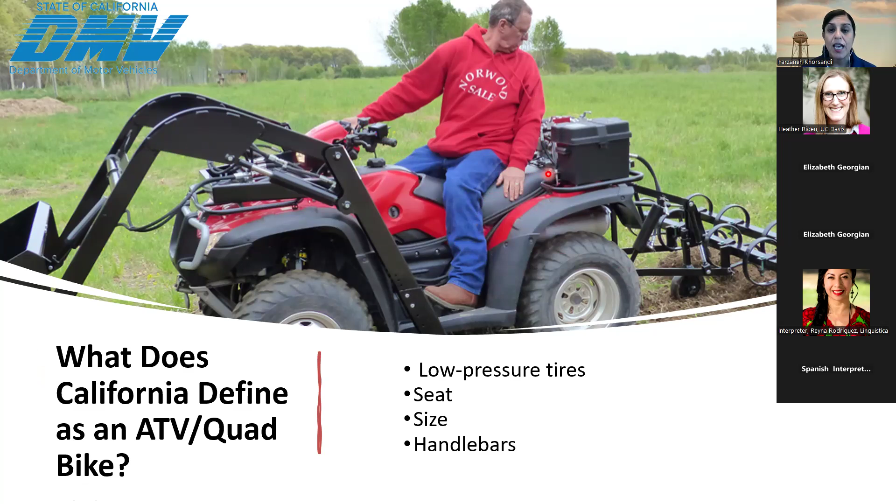Based on California government, there should not be an extra rider on the ATV unless there is an extra seat, and there should not be more than one extra seat on the ATV, based on the DMV definition. Generally around 100 to 200 kids every year die in ATV incidents, and around 500 to 700 adults die. The number is rough, but this is the general idea. And this is not only in agriculture, it's for general ATV incidents.

If we focus only on agriculture, which is the main topic of this presentation, it's good to know that based on OSHA, 3 out of 5 occupational ATV fatalities happen in agriculture. ATVs, after tractors, are the second leading cause of fatalities and injuries in agriculture for adults and kids. If we focus only on kids, this is among the leading causes of injury in agriculture among youths younger than 17 years old.

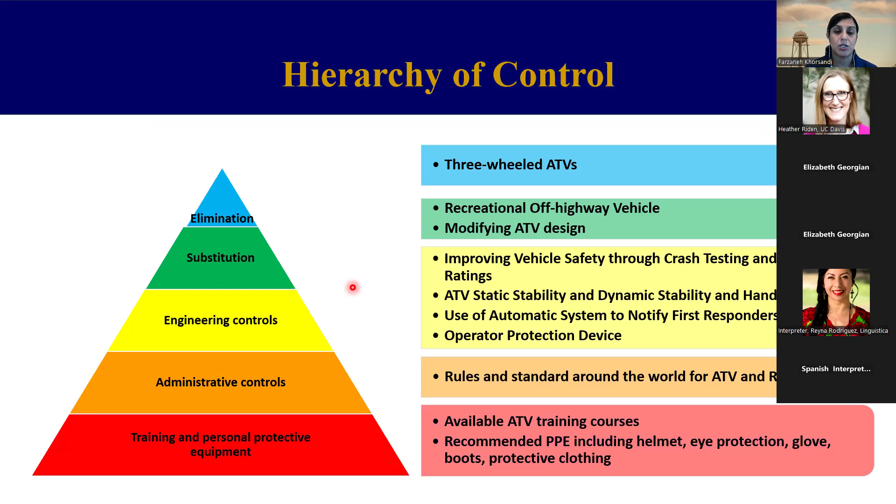In this white paper, developed based on the hierarchy of control, we evaluated different protection methods. We looked at what has been done to this point, what the current need is, and what we should do in future to improve the safety and health of ATV operators. This white paper has been very helpful for navigating my research in ATV study.

The format of this presentation is based on tags and signs on the ATV. I will talk initially about the loading capacity of the ATV, which you can find on the body of the ATV. The next one is tire pressure.

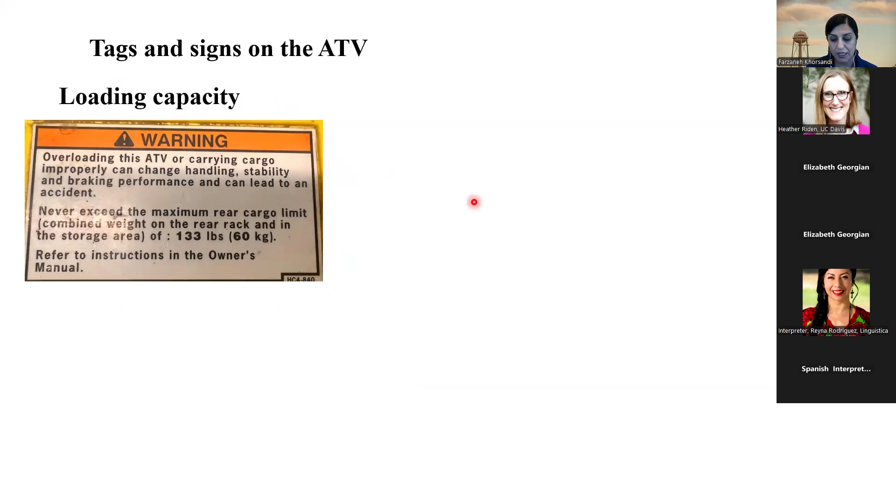We have a small study related to tire pressure, and also age, which is focused on safe riding of ATVs on farms. We also have a small project about passengers and riding ATVs on the road, which is part of this tag, and also using PPE, especially the helmet, for riding ATVs.

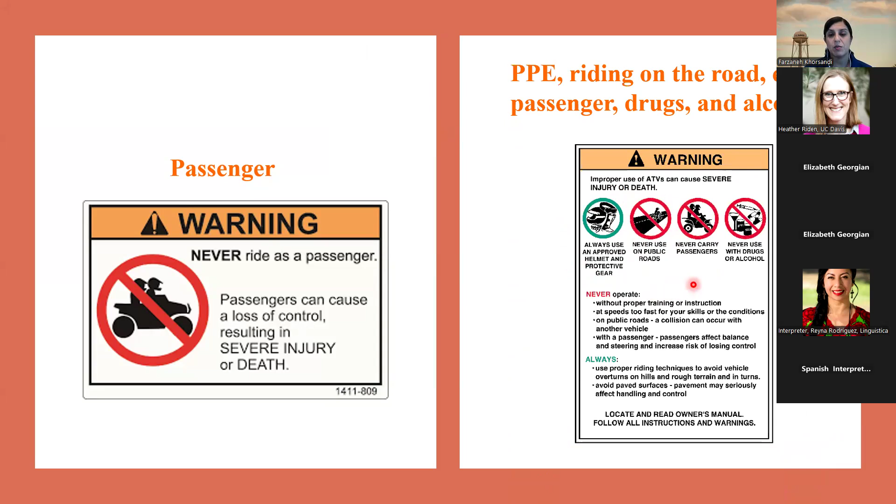For this study, we developed the ATV safety test station. This is the first part, which includes a hydraulically powered tilt table. We have a specific frame for this table, and we place different scales under the tires of the ATV.

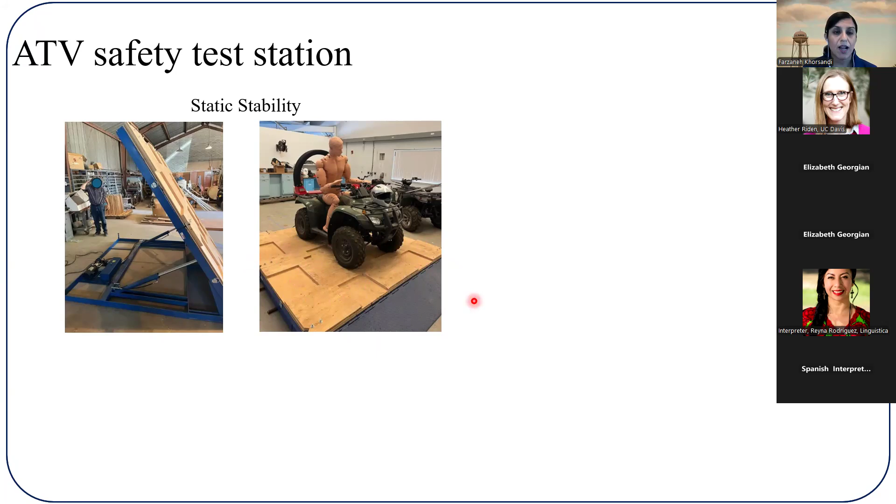I'll explain this more—this is for evaluating the static stability of the ATV. The second part is dynamic stability of the ATV. We designed this outrigger, and we have several sensing setups to measure different riding parameters of the ATV during the dynamic stability test.

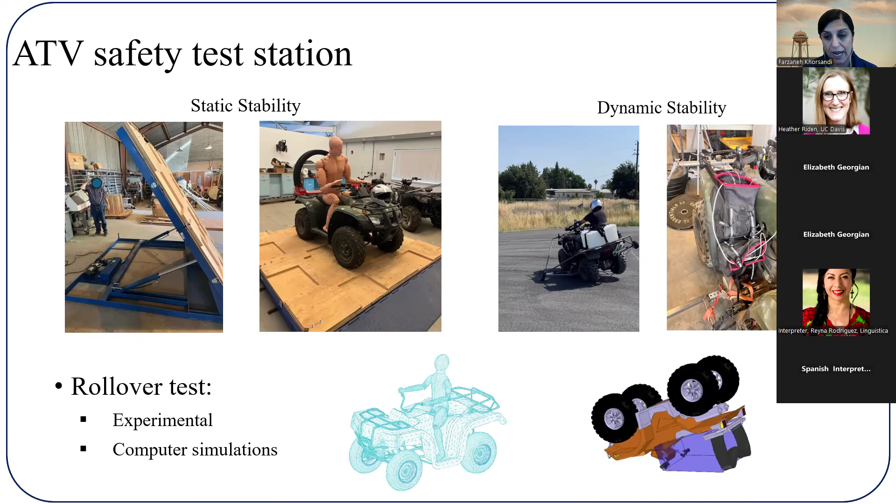We are also developing a finite element model—a multi-body finite element model—for different parts of this ATV safety study. We are also developing an experimental setup for simulating rollover accidents, which I will show step by step in this presentation.

The first part is a project funded by the Western Center for Agricultural Health and Safety. In this project, we focus on prevention and protection. For prevention, we are evaluating and recommending the amount, location, and type of load added to the ATV, and evaluating the stability of the ATV for lateral and longitudinal stability.

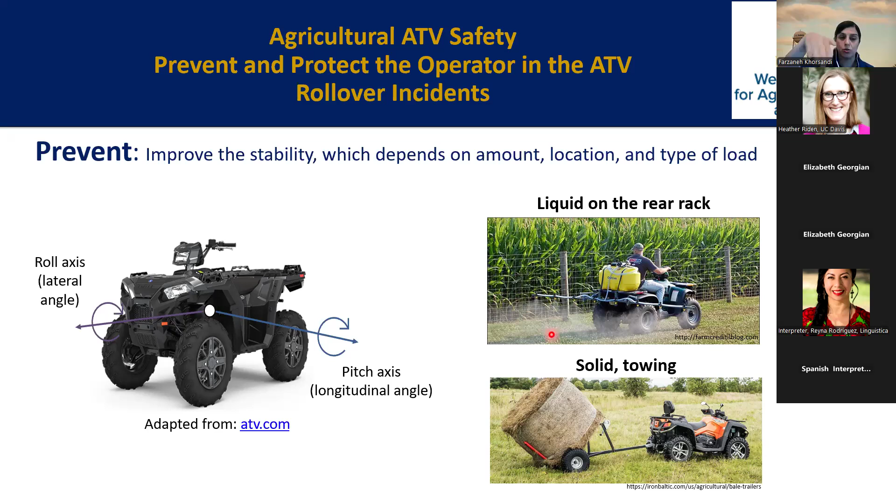I'll give some examples of the load. One is a liquid load on the rear rack, the next is a solid load towed by the ATV. We are evaluating the amount, location, and type of load for both lateral and longitudinal stability of the ATV. This is the sensing setup for the ATV test.

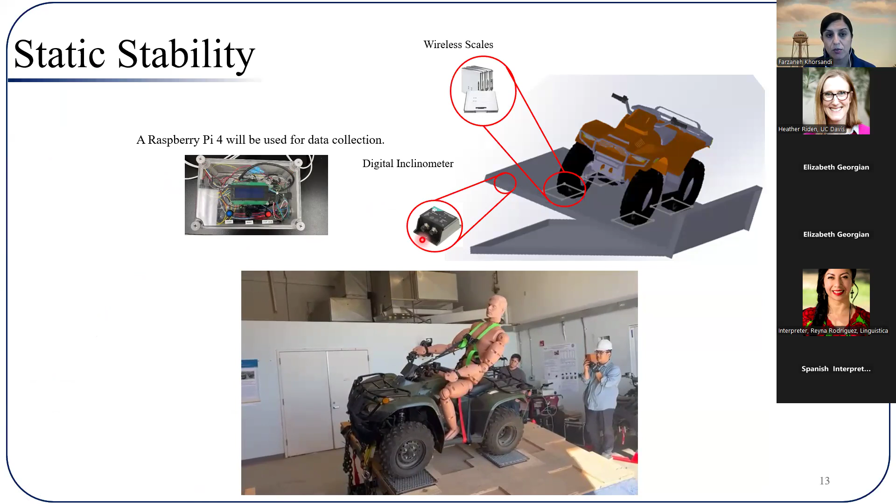I'm going to run this video. For this, we have different parts: the sensing setup for collecting data, using a Raspberry Pi. We have several scales under the tires of the ATV, a dummy, and an angle measurement sensor.

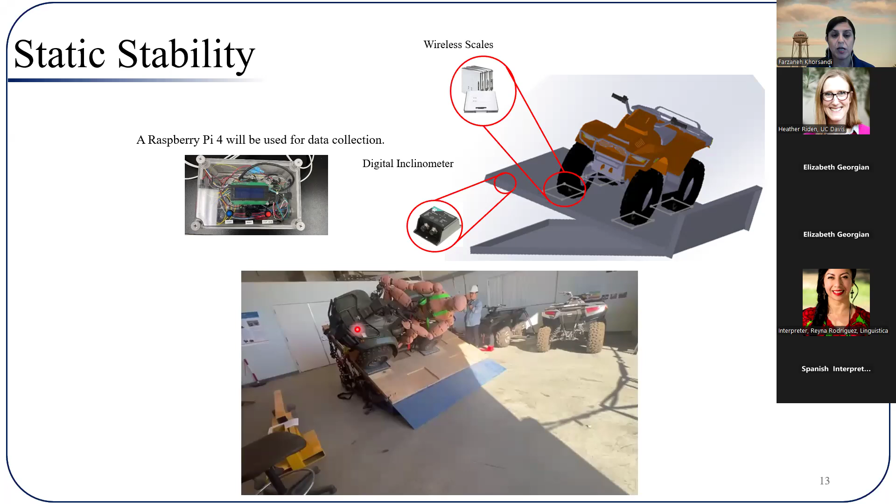We tilt the ATV to the point that it starts rolling over, which is when the top tires show zero on their scales. This is some of the results we collected. This part of the study is almost done.

This is some of the results for the lateral stability test, similar to what I showed you—we tilted the ATV to the side. Based on ANSI/SVIA, the stability of the ATV should be more than 24 degrees, meaning the ATV starts rolling after reaching 24 degrees.

As you can see, we have different types, liquid and solid, based on the recommendation by manufacturer and also safety specialists. When we have liquid, for some models, especially model D and E, and because we didn't bring the title, make and model of the ATV here, but for some of them, they cannot pass the test based on our study. For other ones, the numbers are very close to this cutoff that is based on the ANSI/SVIA standard for ATVs.

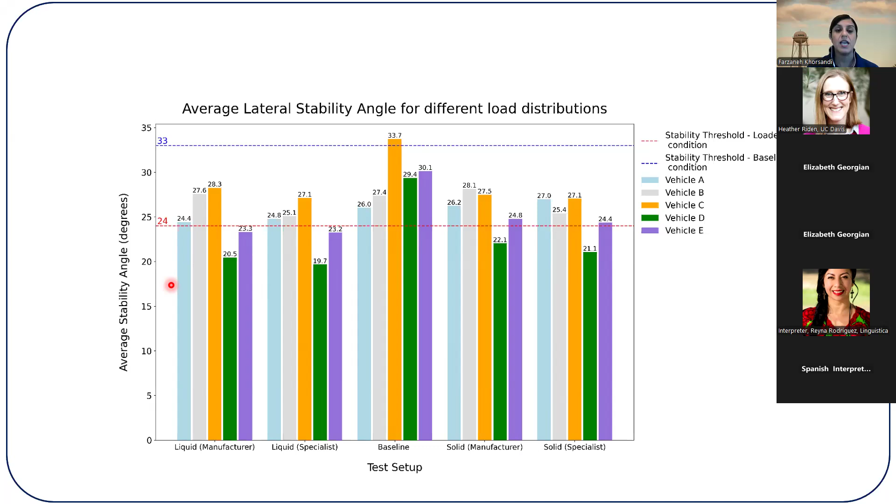Results of this study, we are publishing them in a journal. Again, we are hoping to provide recommendations about type, location, and amount of the load. Especially we have concern about the liquid load, because the liquid load has shift, especially when the tank is semi-full. This is a dynamic stability test.

We have steady state circular driving test and J-turn test. I will go through both of them. We also have a bump test that we didn't have any data for this point, and because of that I didn't present the bump test.

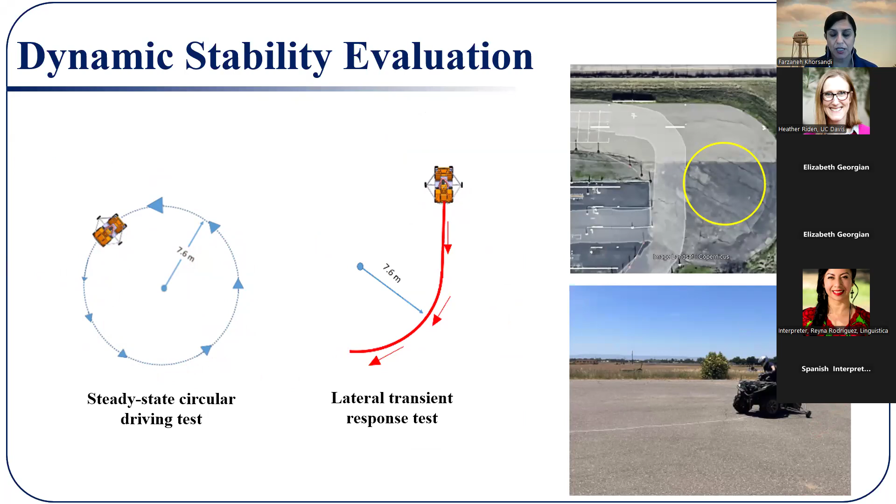We are conducting this study in the Pavement Center in UC Davis. They are very generous to give us the chance to use their facility to conduct our test. I will show you this test.

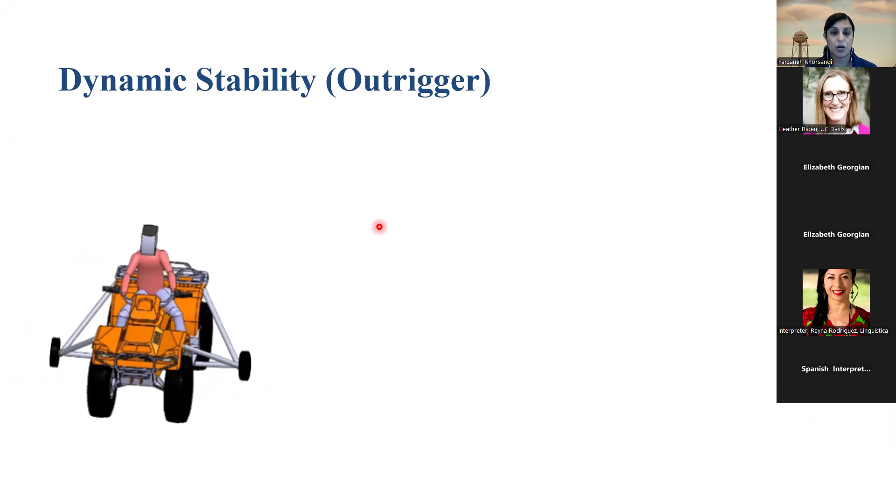For this test and for safety purposes, we designed this outrigger, which is a universal outrigger, meaning we designed one for different designs of ATV, and with simple modifications we can attach it to the ATV. I would like to thank Jed, our shop specialist, who helped us with this very creative design.

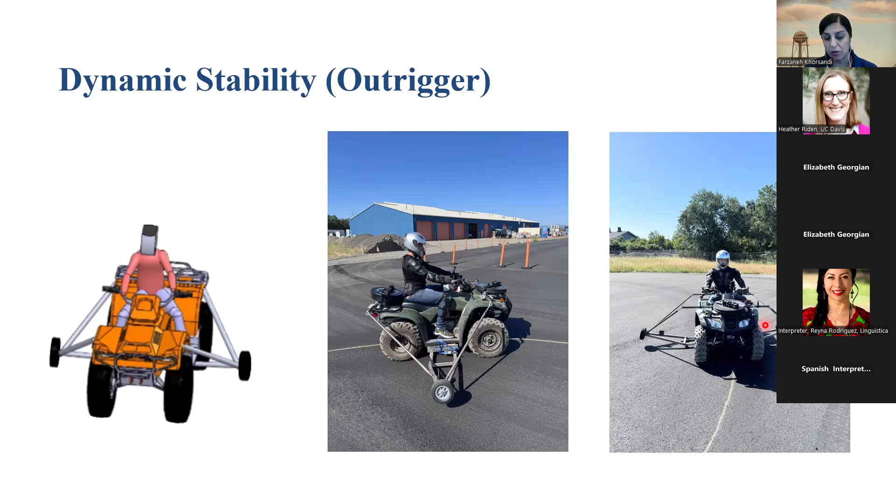Again, for this study, we have the load in the rear and also in the front, and also we have the liquid tanks. As you can see, I'm not sure if it's clear here, we have a semi-full liquid tank to evaluate the liquid shift in these studies as well.

Based on previous studies, around 30% of ATV related incidents happen when there is a liquid, when the operator is doing the spraying. Because of that, we have a specific part of the study focusing on liquid tanks.

This is a dynamic stability test, the J-turn test. For this test, we run the ATV on a straight line, then we have the sharp turn, and then we evaluate the response time of the ATV. This is one of the tests, as you can see.

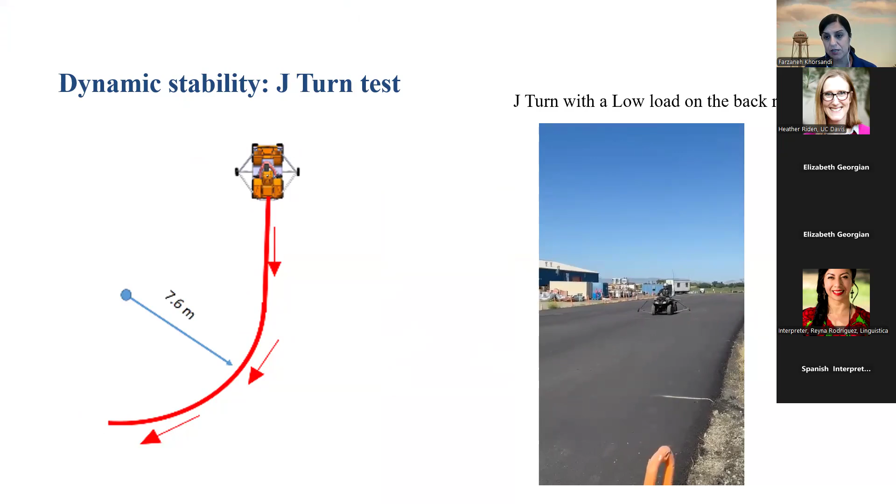As you can see, we have a small load on the front and a small load on the back. This is based on, I think, manufacturer recommendation. This is some results of this study. Again, we evaluate the response time of the ATV.

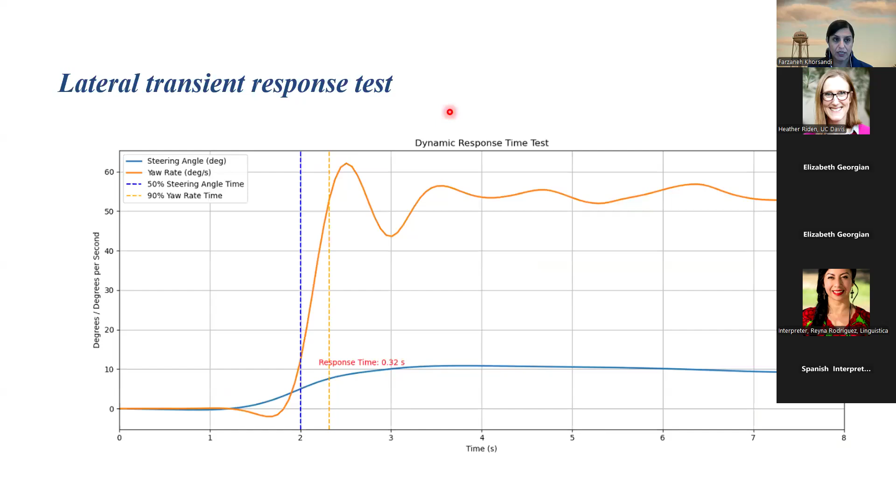The other one is the steady state circular driving test. For this one, we start driving the ATV around this circle, and we increase the speed of the ATV until the point that the ATV either goes toward the center or it gets away from the center, which we call oversteering and understeering.

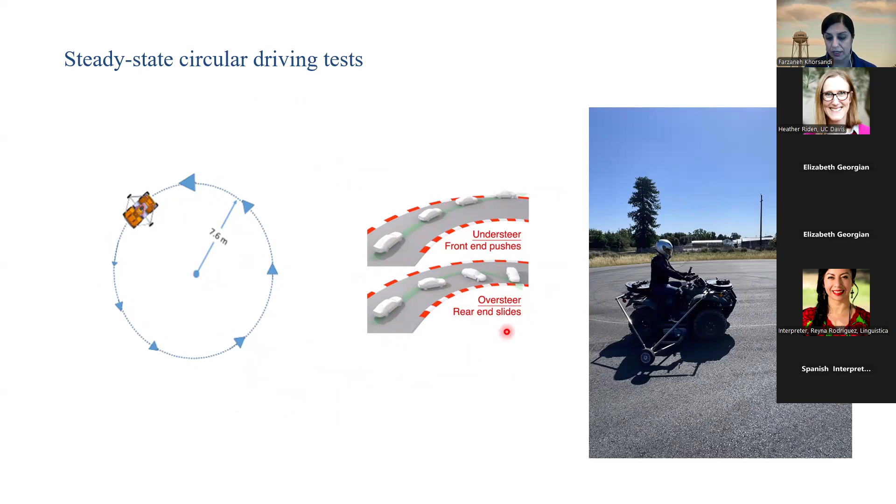This is some of the results of this study. We have understeering here until 0.55 G, and after 0.55 G we have oversteering. This condition is representative of an unstable riding ATV condition.

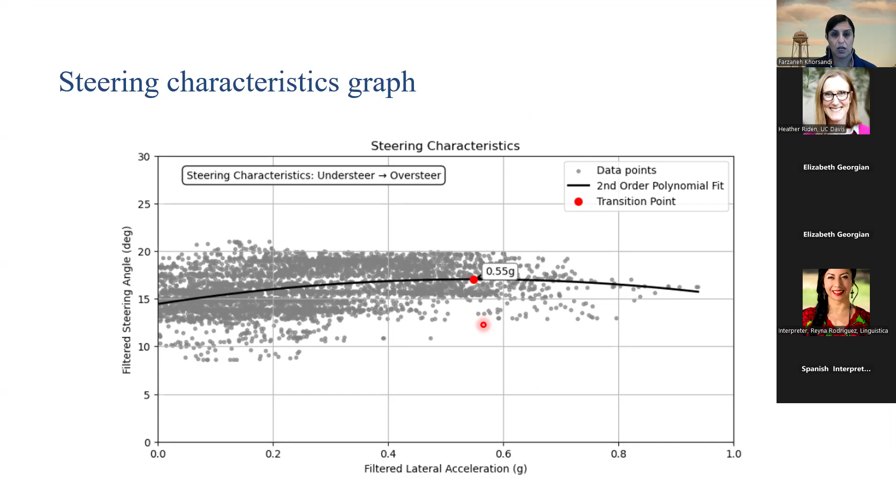Again, we are still working on the result of dynamic stability. I showed you for static stability we have some kind of conclusion for the study, but for dynamic stability we are still working and collecting the data. I would like to acknowledge Fernando Santos for all he is doing; he is the one running all of those tests.

As I mentioned, this part of the project focuses on, one, prevention, and second, protection. Prevention: we are hoping that by recommending the amount of added load to the ATV, we prevent rollover incidents and improve the stability of the ATV. The second part is protection, which means we have different designs of crash protection devices. I will talk a little bit about crash protection devices.

You can see different designs of crash protection devices in this slide. These two, quad bar and quad bar flexi, they are from Australia. Lifeguard is from New Zealand, and AR-Quad is from Spain. The way these crash protection devices protect the operator is by providing a crawl zone under the ATV.

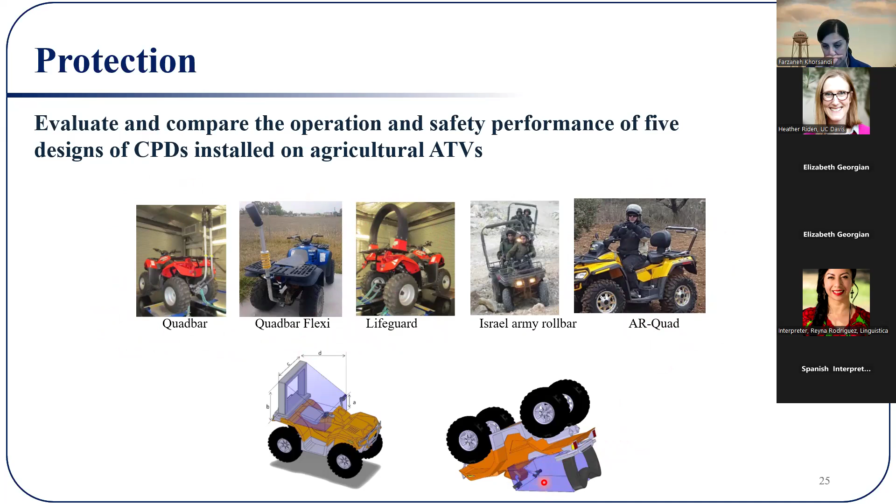This blue area is the crawl zone that the CPD provides for the operator, and I will show you how they work.

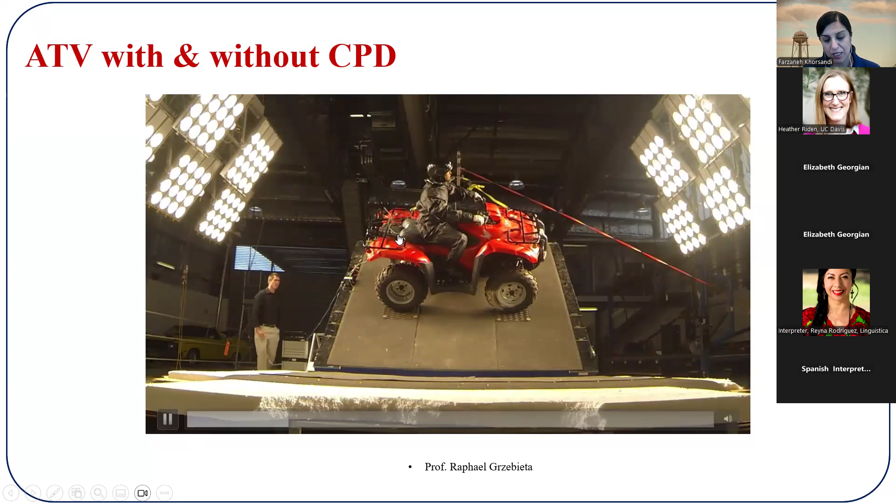This is one of the studies that was conducted by Raphael Grzebieta in Australia. As you can see, this is the ATV without CPD, and you can see how it crushed the operator.

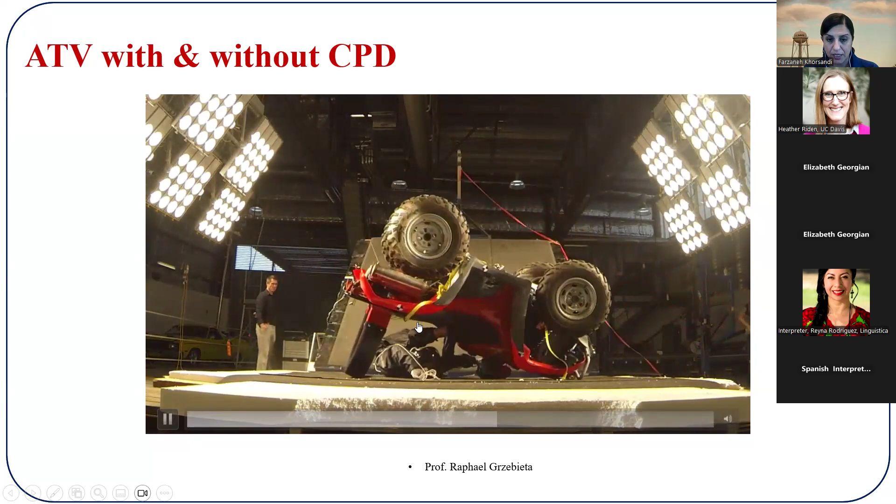The next one is ATV with lifeguard, and you can see that the lifeguard provides a clearance zone under the ATV. This is the clearance zone under the ATV. The last one is a quad bar that prevents the continuous roll of the ATV.

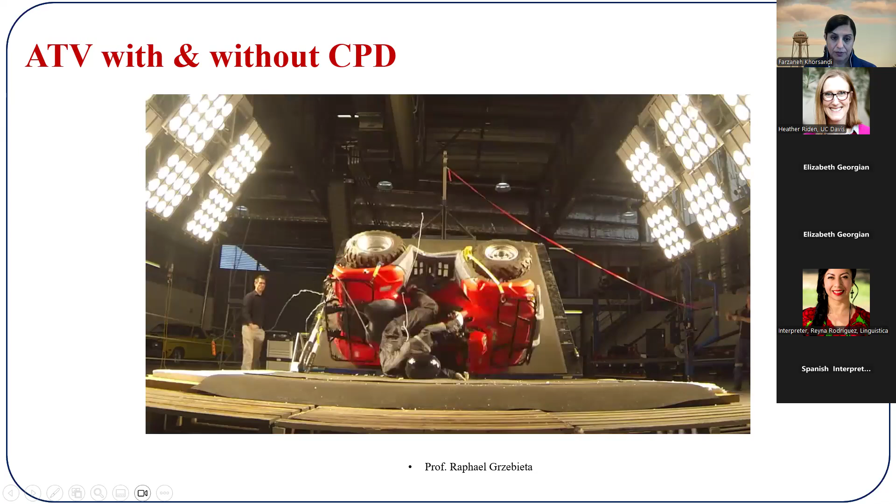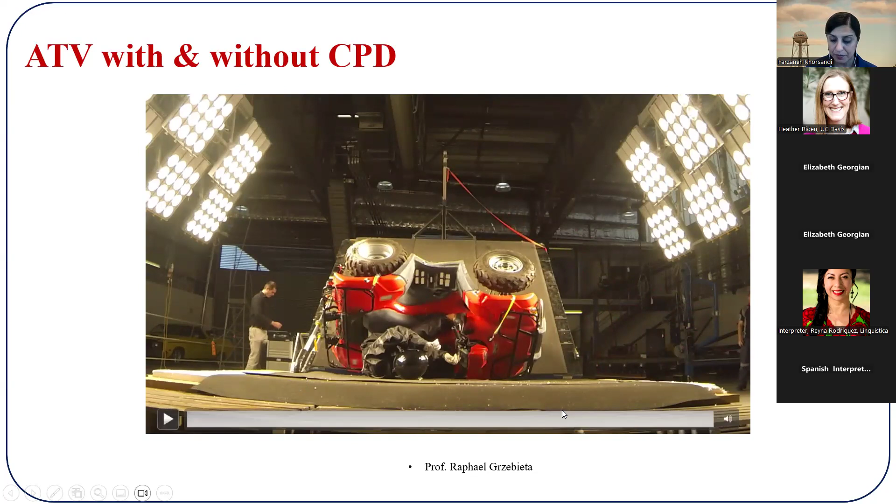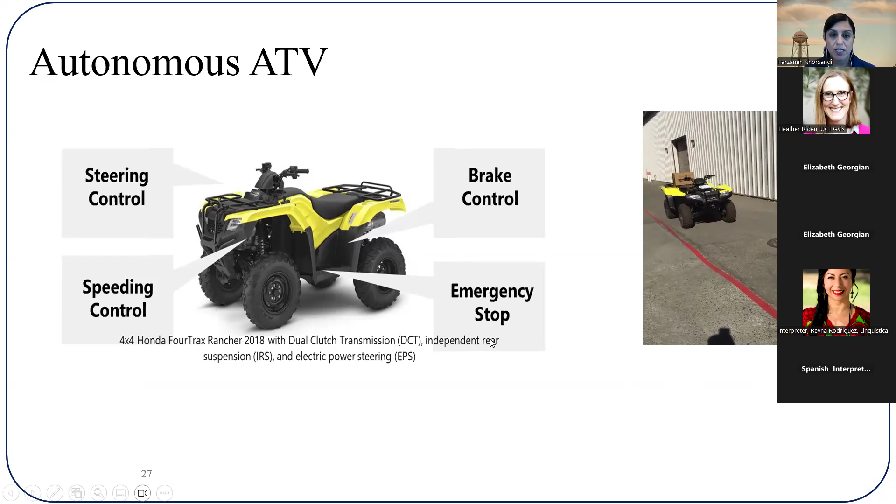For this part of the study, we developed an autonomous ATV. This is our autonomous ATV, and this is the initial test that we had. This is during COVID, you can see we were wearing masks, but we are still working on this part of the study. This is the autonomous ATV, and we also need one of these ATDs.

They are very expensive, around $500,000. I've been searching for the past 5 years and couldn't find anyone, but since our study is focused on asphyxiation, I'm going to do the test using one of these pressure pads, placing it on the body of the dummy. I hope that we can get some good results.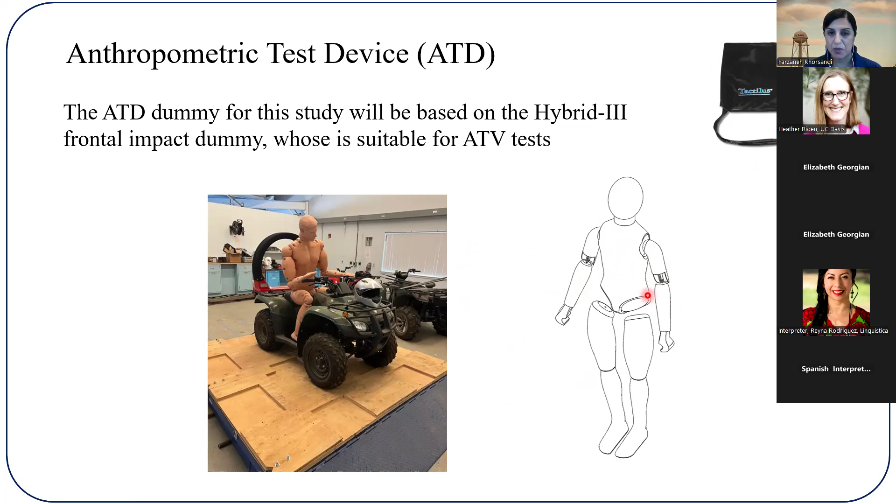Besides that, we are using different cameras to record the incident, and we also have one high speed camera that can take a lot of photos. I don't remember how many frames per second, but we're going to use this camera for our study to record the data. And this is the test setup.

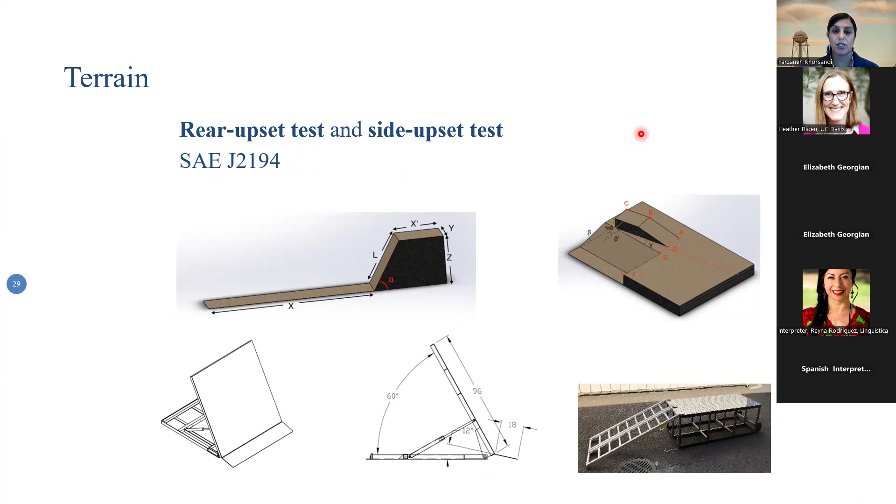We are evaluating the side roll and rear roll, and we modified the SAE J2194 standard. We are hoping to evaluate the performance of CPD, especially for agricultural setups, for both side roll and rear roll. For the CPD project, we have several designs of CPDs, and this is a link to the study.

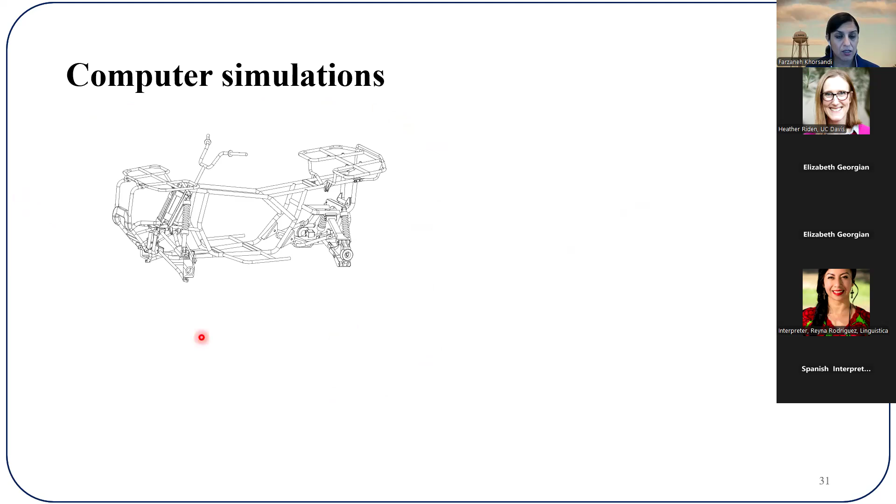The next part of this study is computer simulation. This is the simulated chassis of the ATV. We tested the suspension system and also the tire, and got the different characteristics of them. We have a pretty accurate model of the ATV and also the suspension and tire system.

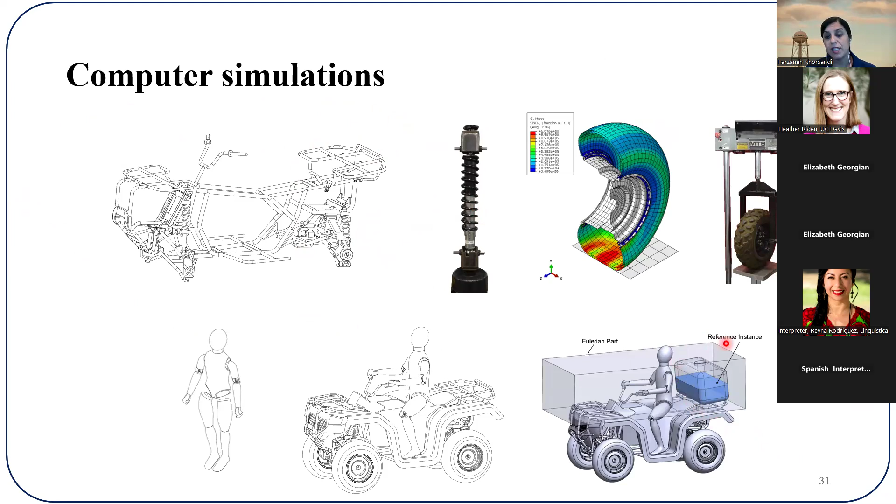We also have a dummy. We simulate our dummy, and we also simulate the liquid tank, which was one of the most challenging parts of this study. In this study, since we have a limited number of autonomous ATVs and scenarios that we can evaluate with experimental simulation...

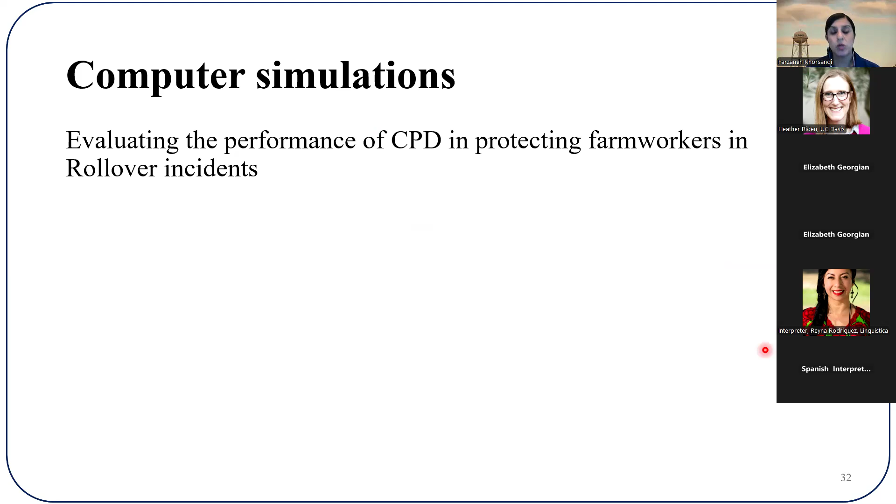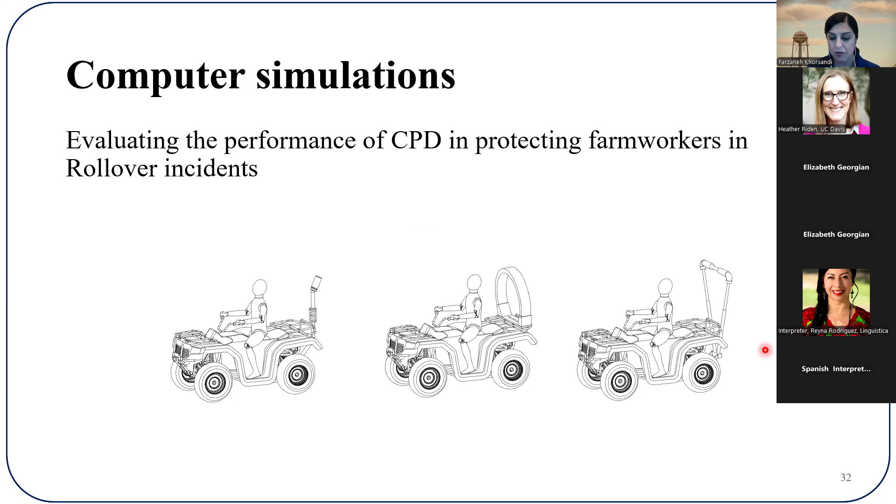We're going to use computer simulation to collect more scenarios, more ATVs, and more designs of CPDs. We simulate different designs of CPDs, as you can see here. We haven't started the simulation for CPDs specifically yet, but we are on the way to simulate ATVs, rollover, and other scenarios.

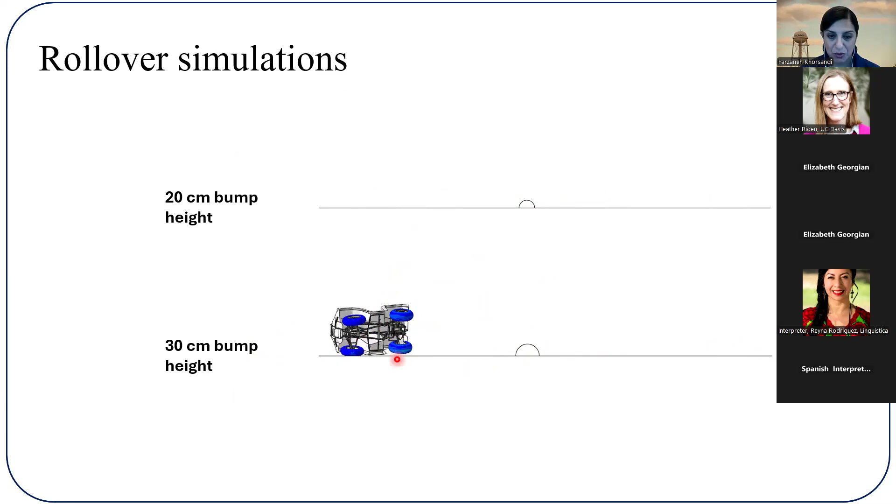This is one of our initial results. We were just so excited to get this result. This is a 20 centimeter bump, and the bottom one is a 30 centimeter bump, and we could finally show that they roll over. It's very difficult to do this simulation, because I remember at some point my student said that when the ATV reached the bump, it just started flying, because we forgot to lock one degree of freedom of the ATV.

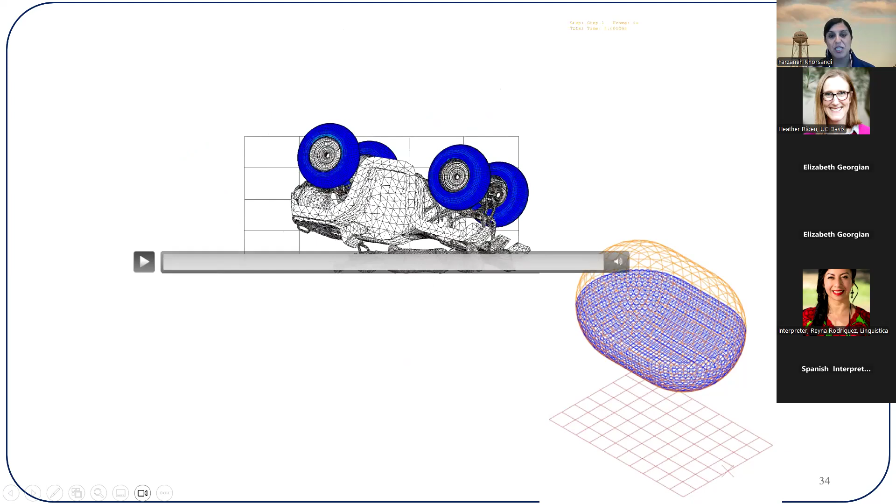Another part of this study, we simulate the liquid tank, which is again very challenging. This is the liquid tank hitting the ground, and you can see the water sloshing. We will combine all of them for our final simulations.

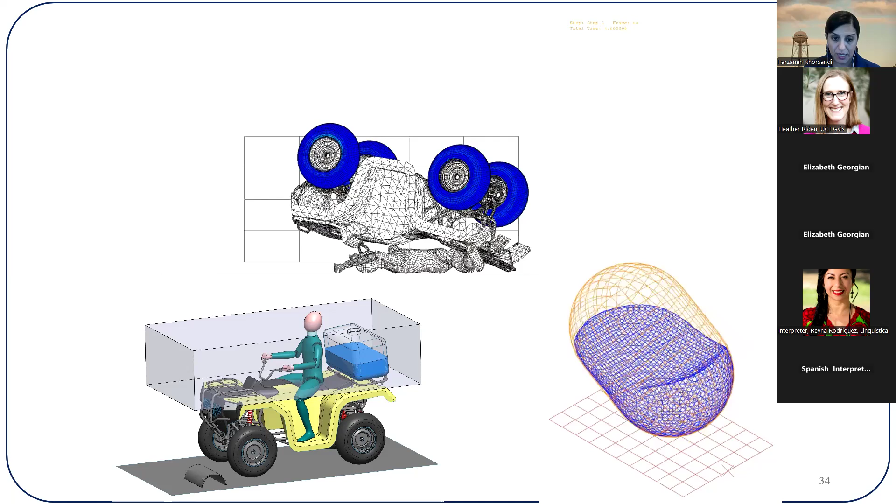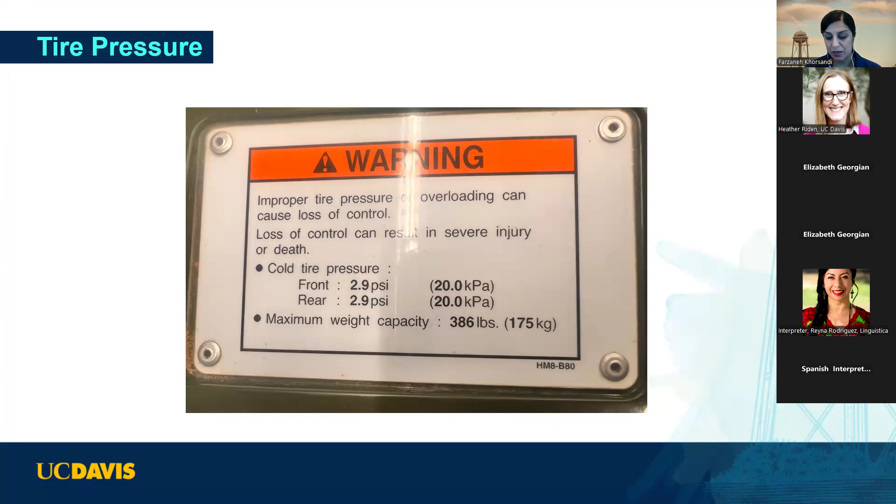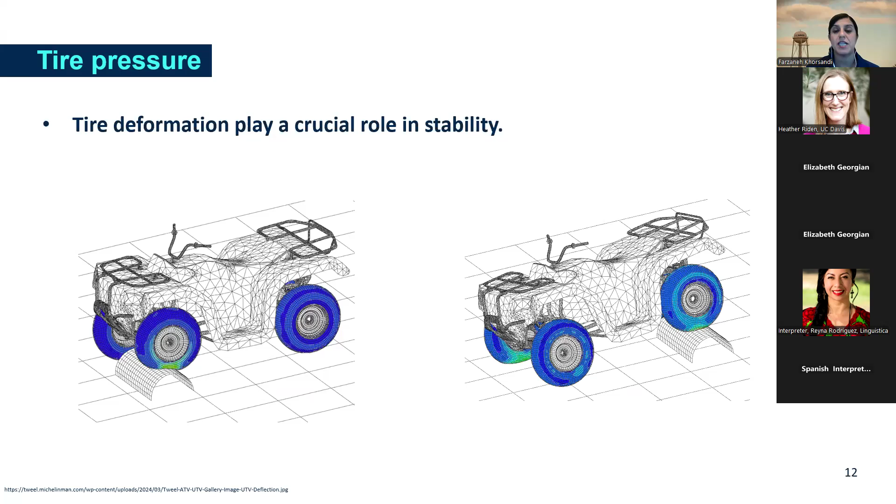And again, the next part is tire pressure. As I mentioned, we evaluate the amount of load, and now we are evaluating the tire pressure. As you know, the ATV has four low-pressure tires, and we measure the static stability using the table that I showed you in previous slides. And we are also using computer simulation to see how it affects the stability of the ATV in rollover accidents.

Another part of this study, again for protection, is AgroGuardian. This is ATV rollover incident prediction, detection and notification. As you can see, it starts from 1 here when the operator has the incident. It connects to a satellite. For this specific device, there is no need for an internet connection or cell phone service. It connects to satellites, and through a third party, it notifies the first responders. Using this device, we can collect different operational conditions and factors of the ATV as well.

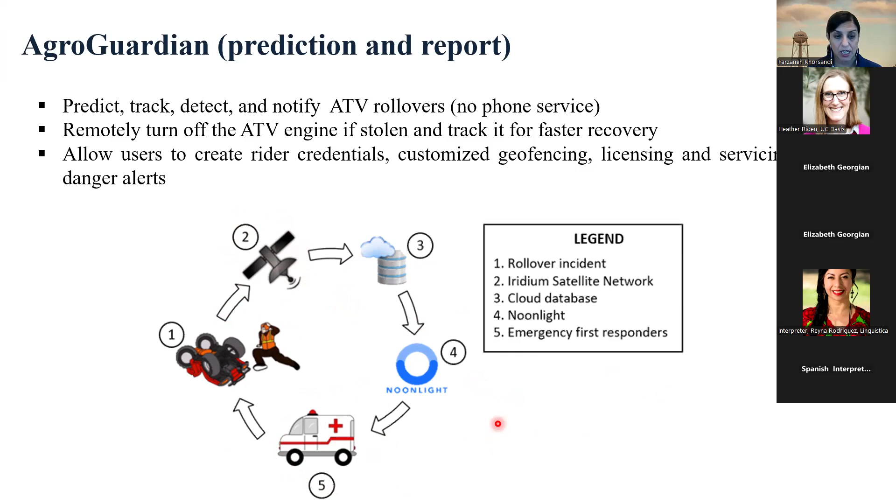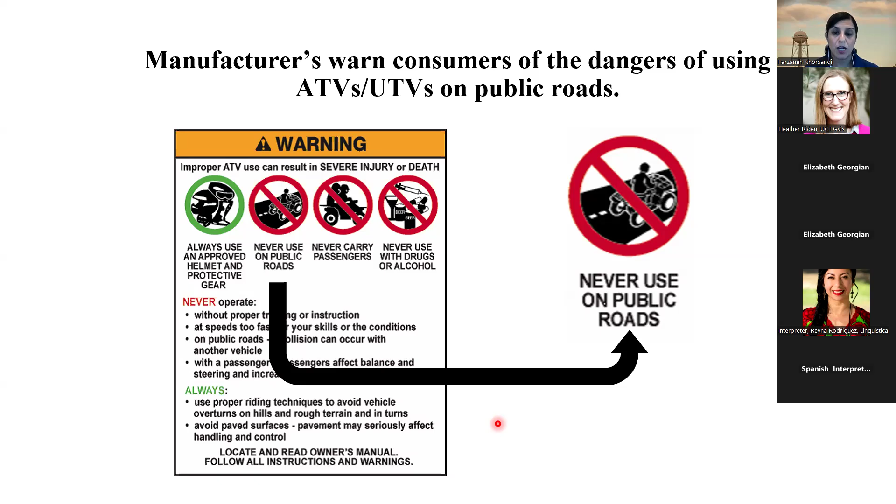The next part of this study is riding the ATV on roads. In several states, it's legal to ride ATVs on roads, and based on what I heard, the number is increasing. NIOSH had some specific concern about riding ATVs on roads. This is the initial idea that started this part of the project, why we should not ride the ATV on roads. Around 60% of ATV fatalities happen on roadways. And a significant portion of them, 2/3, is the result of the ATV incident by itself. It's not because the ATV hit another vehicle. 2/3 of them happen by the ATV losing control by itself, or something happening to the ATV by itself. And there are some concerns in this regard.

This study was mainly conducted by one of my former undergraduate students, Nicholas. In this study, we are evaluating why we should not ride the ATV on roads. Again, ATVs are unstable because they have a high center of gravity and narrow track widths. In addition to that, their tires, as you can see, the right one is the ATV tire and the left one is the car tire, are not designed for on-road application. They are off-road tires. The next one is the rear axle. Some ATVs have a solid rear axle and a fixed rear differential that makes it more challenging for ATVs to turn sharp curves, especially when the speed is higher.

I'm continuing this part of the study as a part of NCERA again. I'm hoping to get feedback from different states and different researchers and have some kind of report or publication in this regard as well, documenting why we should not let ATVs on roads. It needs some engineering evaluation that I'm hoping to do with my research team.

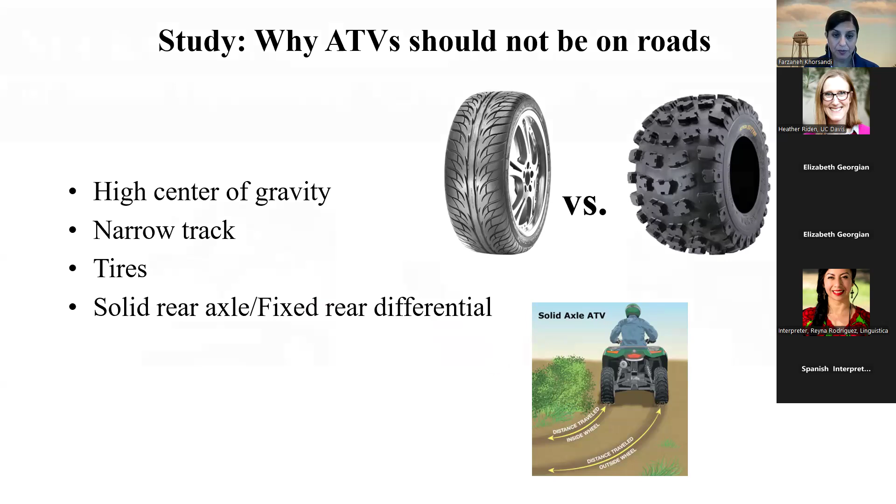The next part of this study, as you remember, one of the tags on the ATV was about age. This one is funded by the National Children's Center, which is a NIOSH-funded center. The main focus of this study is youth operating agricultural ATVs on farms. For this study, we hypothesize that kids are not able to ride ATVs because they are not physically mature enough or physically ready to ride them. The first part is that children cannot properly reach different controls of the ATV. They may reach the controls, but they may not be strong enough to, for example, press the handbrake, push the handlebar or press the foot brake. And also they have a restricted field of vision.

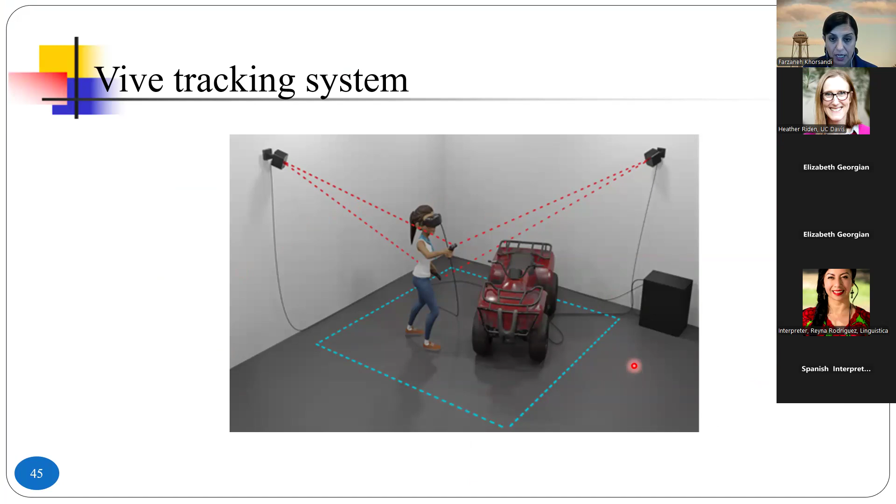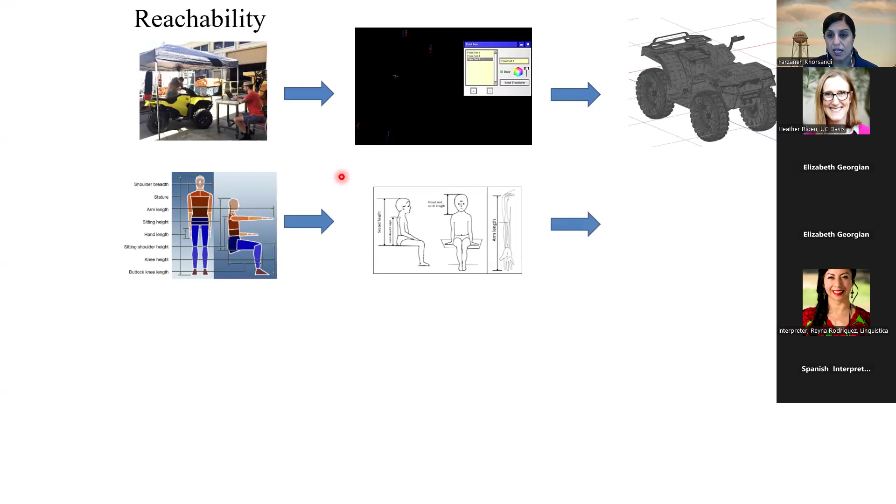We are close to being done with this study, and I can show you some of the final results as well. We use the Vive tracking system for our simulation. With this system that we developed, we can simulate the ATV with an accuracy of 1 millimeter. This is how we did the study. As you can see, this is the tent that has the emitter and receiver of the Vive tracking. We simulate the ATV. We simulate kids with different ages, percentiles and genders. These are the simulations, and then we combine them in interactive scenarios. For example, you can see one of them here that is turning the handlebar from lock to lock. This is one of the examples.

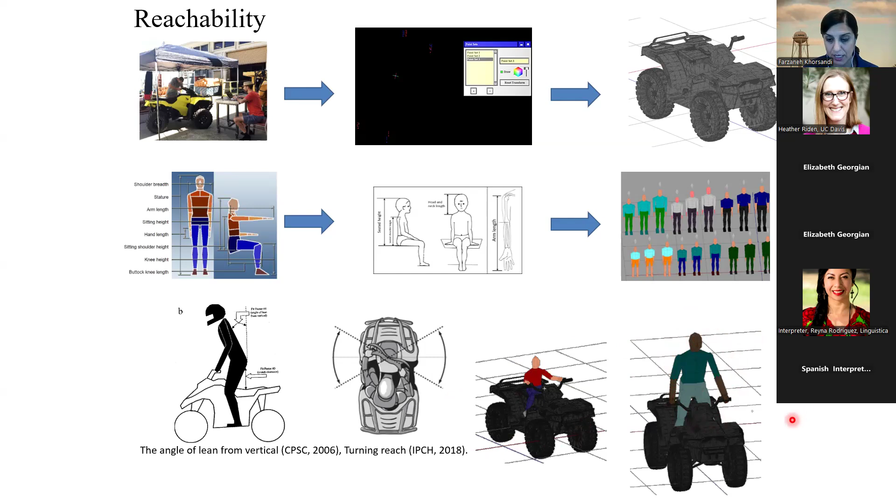And this is based on CPSC and also other resources. And this is, for example, a 6-year-old kid. I don't remember the percentile. And again, we try to simulate if this kid can ride the ATV, can turn the handlebar from lock to lock. And again, we had different percentiles and also different ages of youth riding these simulated ATVs.

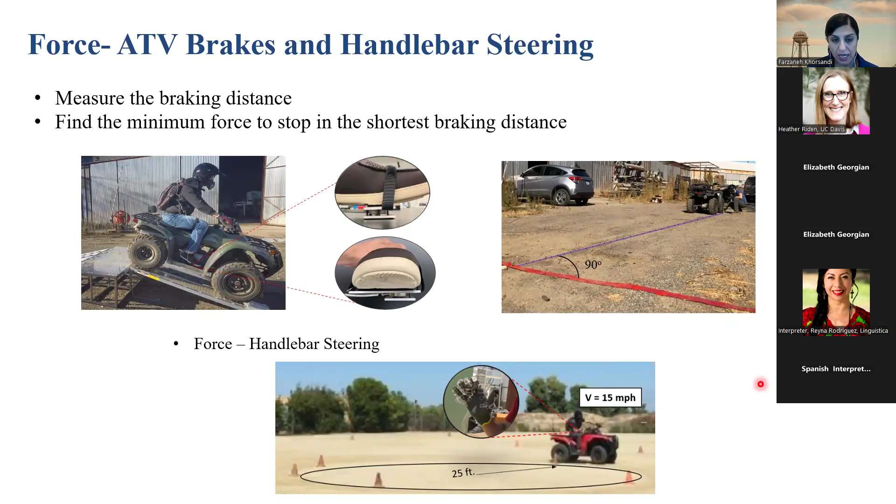And another part of this study, as I said, we evaluate if kids are able to activate different controls of the ATV. This is our setup to evaluate if they can press the foot brake efficiently and activate the foot brake. We had these sensors on the shoes so we can measure the force, and we also have several sensors on the glove so we can measure if they are able to activate the handbrake or turn the handlebar effectively.

And I don't want to go into a lot of details of this study. They are available in several publications. You can find them on Google Scholar and other resources. We have, I think, 4 or 5 publications in this regard. But the final recommendation out of this study is some practical recommendations: if you want to let a kid ride an ATV, what you should do to evaluate their performance or to see if they are physically ready to ride the ATV.

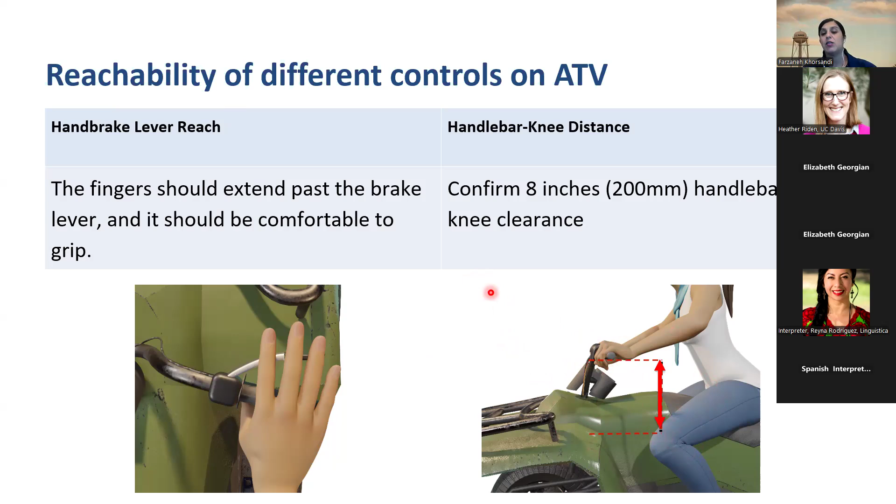For example, this is one of them, handbrake lever reach. If you want to see if a kid is able to press the handbrake, the first part of their middle finger should pass the handbrake. And the second one, for example, is that the distance between the knee and the handlebar should be around 8 inches. If it's smaller, then they cannot turn the handlebar effectively. And these are some of the examples. We have a larger list of criteria.

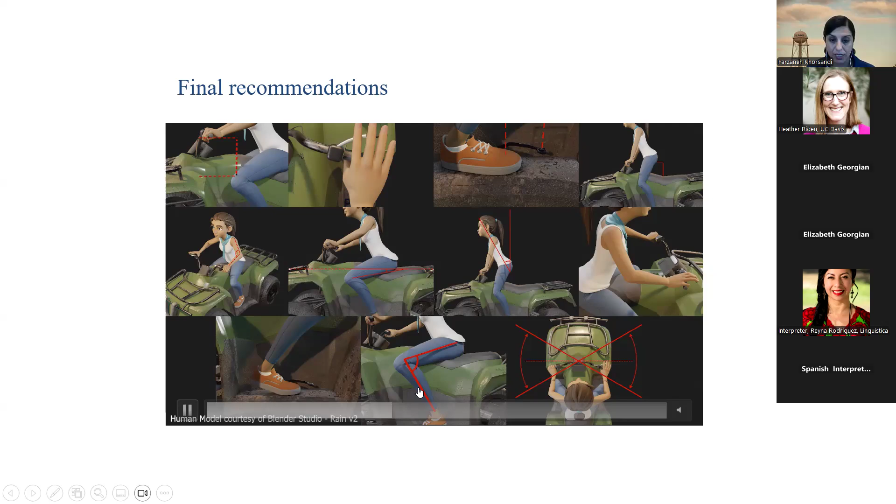We are also developing this phone application that walks parents, or even kids, step by step to evaluate different riding criteria. Right now, I'm working to send this app and also the developed recommendation list to different researchers around the US and outside the US to get their feedback and see how I can improve it and make it more user-friendly.

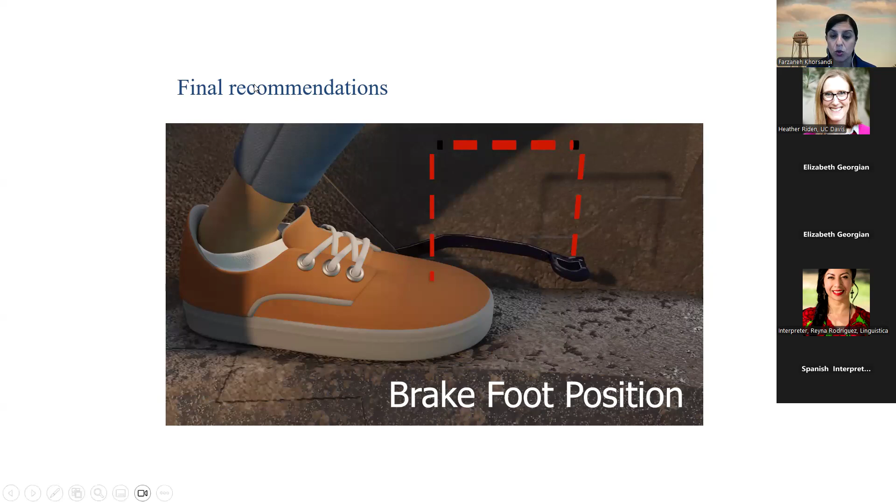And these are some of the recommendations. For example, for this one, we recommend having the helmet and the long sleeve, but again, to show the angles and different parts of the body, we are using this setup. These are some of the criteria. Again, we are still working on this part of the study.

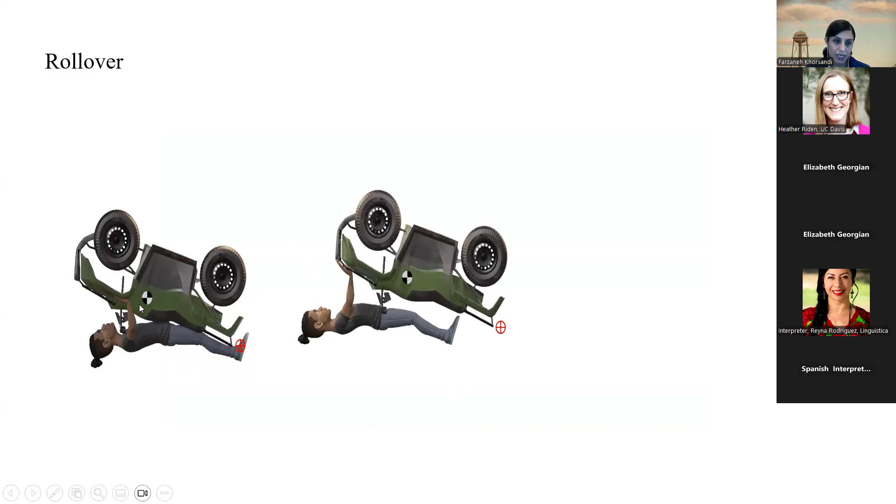And we also evaluate the rollover simulation, simulating the rollover for kids in different scenarios. You can see this scenario where they can only use their hand. The second scenario is that they can use their hand fully, and it's at a bigger distance from the center of gravity. And in the next scenario, they can use both foot and hand to push the ATV off of their body. Unfortunately, in most of the cases that we evaluate, kids are not able to push the ATV off of their body. We also evaluate youth ATVs for youth. They are not even able to push those ATVs off of their body in most of the cases.

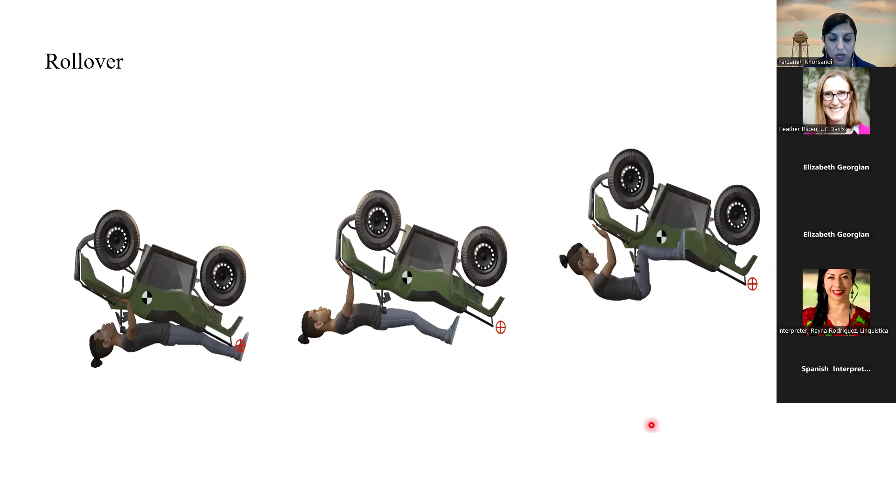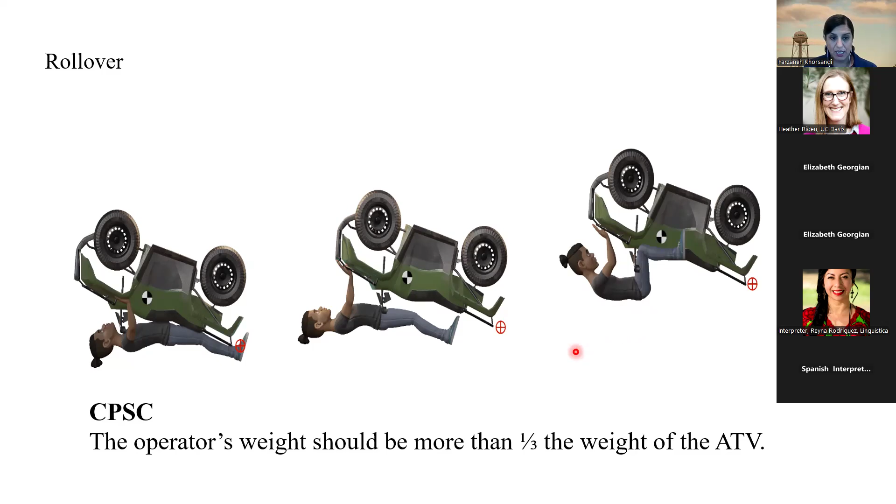But the current recommendation based on CPSC is that the operator weight, or the kid's weight, should be more than 1/3 of the weight of the ATV, which may not even be correct for a lot of adults, considering the weight of the ATVs. As you remember, the weight should not be more than 900 pounds. And based on this, the operator's weight should be around 300 pounds. These are some of the results of this study. Again, you can find them online.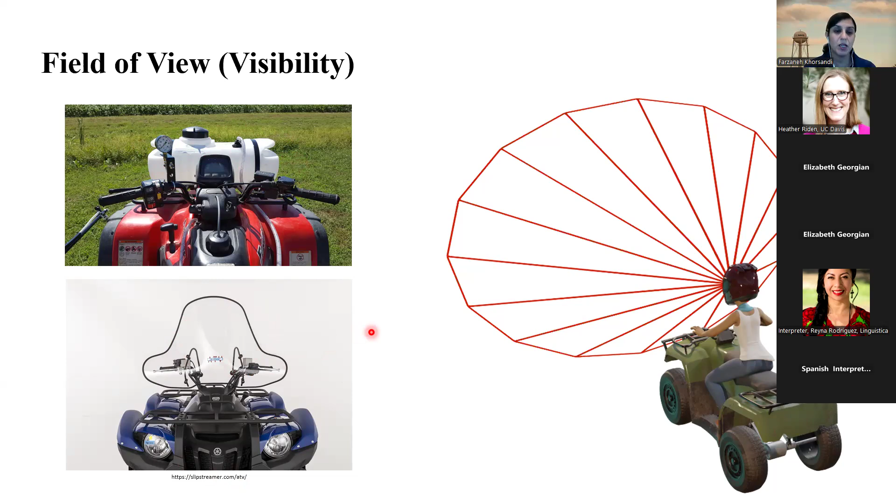And in another part, we evaluate the field of vision of the kids when there is a sprayer in front of them, and also when there is a windshield, maybe frosted or with dust on it, that is not easy to see through. And again, the results showed that in most cases, when there is a liquid tank in front of the kids, their field of vision is very limited, and it's recommended not to let them use a sprayer in front of them. Also, clean the windshield. We also evaluate how the helmet affects their visibility, which has some effect, but it's not very significant. Again, you can see the results of this study as well.

In another study, we also developed an ATV riding simulator. With this one, our main goal was to evaluate youth's mental capabilities for riding the ATV. We evaluated their physical capability. The next step would be evaluating their mental capability, which unfortunately we couldn't get funding for to this point. But this simulator can be used for educational purposes as well.

And for this specific study, we installed 4 weather stations around California in different locations with different weather conditions, and also where there is more density of farm worker population. And we measure different weather factors, and we are predicting WBGT and hoping to develop a phone application that can predict heat-related illnesses for farm workers.

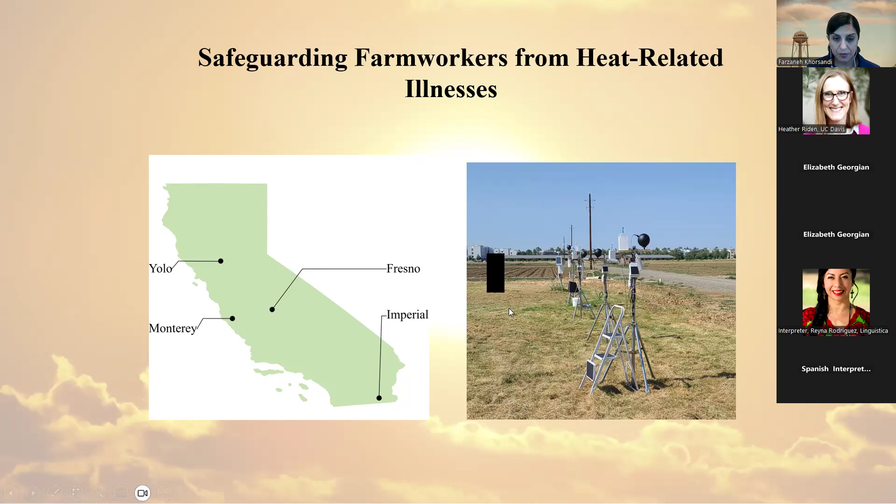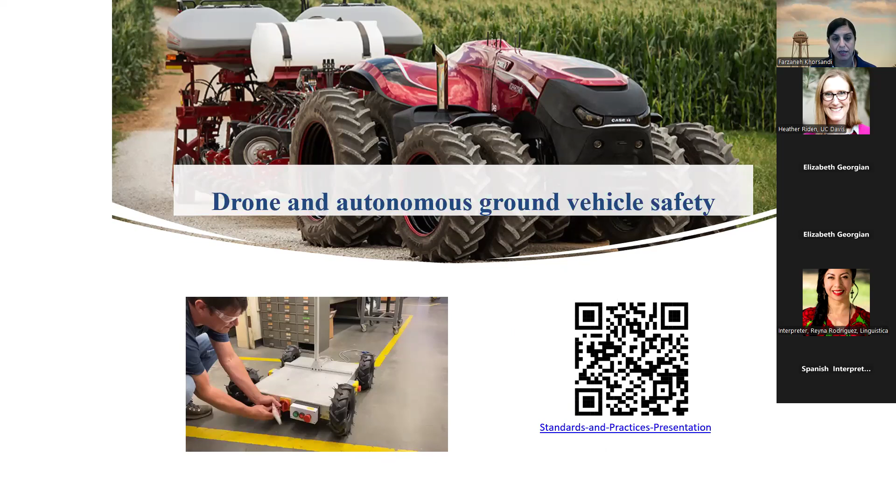And other projects: we recently submitted a manuscript related to application of chemicals and workers' safety. It was a literature review, and we are hoping in the future to have a more comprehensive and bigger study about application of chemicals and operator safety.

I'm also a part of AHMCT, which works with Caltrans, and I have an ongoing project that focuses on roadside workers' safety. I'm developing a tool that can protect Caltrans roadside workers from high-risk working scenarios. And we also had, this is a pretty old project, but it was about cannabis worker safety.

And in addition to research, we have the lab, and my students help me as well. We have outreach activities, and the outreach activities include classes, hands-on activities, and tours. I think this past summer, I had over 100 talks just during 3 months of summer. Very heavy outreach activities, and now I still have some of these activities going on.

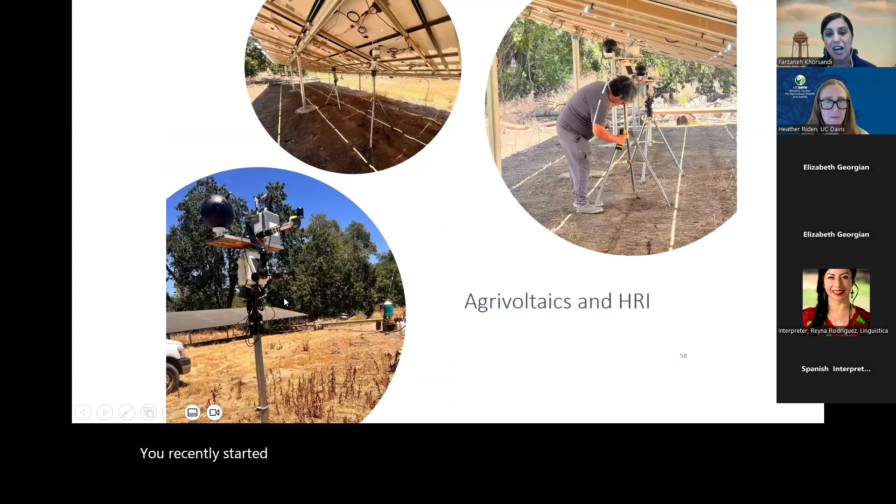Yeah, I can share. At the last minute I deleted a lot of my slides because I thought maybe I don't have time for all of them. But this is one of our exciting projects that we recently started. Let me see. You can see this. This is one of the projects where we are trying to use agrivoltaics. They are solar panels that are used specifically on farms.

And we have different weather stations with different heights under them. And we want to see if we can use them as a shading source for farm workers. We have been collecting data for, I think, around 4 or 5 months. And we are trying to evaluate the vertical solar panels too. The shade is limited, but maybe they can also be used. And also the solar panels that have more vegetation under them.

Again, it's ongoing. We are collecting data continuously at two heights: one for standing farmers, and the other for seated ones. We also look at what safety features we should consider if we want to recommend them as a shading source. And we are estimating how being under the solar panel shade affects core body temperature.

But this is one of the ongoing projects. I applied for several grants for it, but I couldn't get them. But we keep working on it. This is one of the exciting projects that we are working on right now.

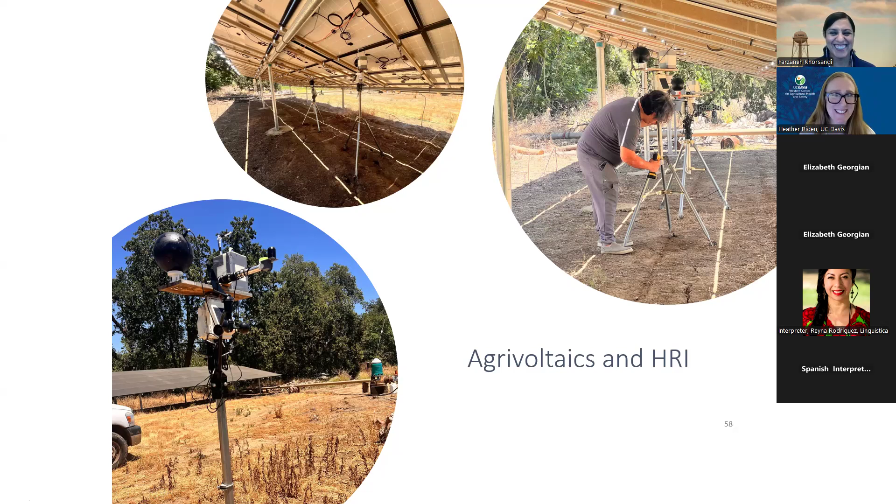Yeah. Just for this study, Miyang and I were going to the agrivoltaics site, and several times we banged our heads. There you go. You should be keeping track of all of those things as issues that we need to make sure are addressed.